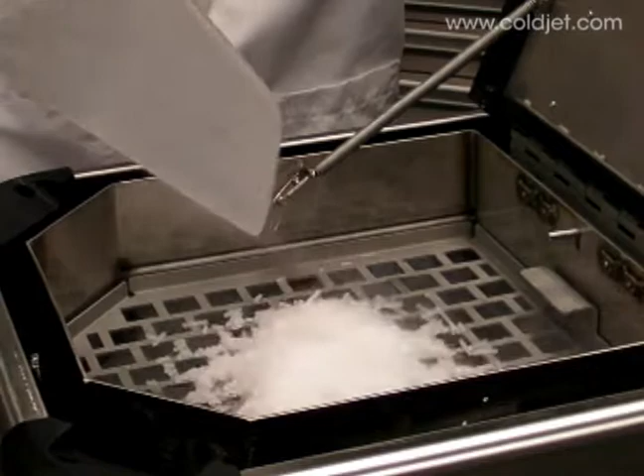Dry ice blasting is a process in which particles of solid carbon dioxide, commonly known as dry ice, are propelled at high velocities to impact and clean a surface. Upon impact, the particles return to their natural state as carbon dioxide gas, and thus simply disappear as they clean.

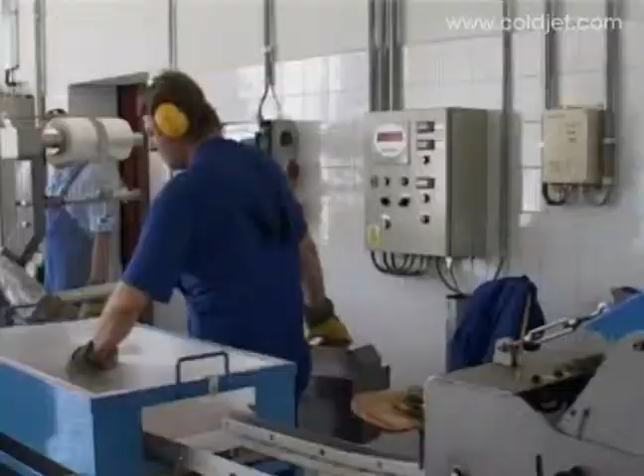From an environmental standpoint, dry ice is made from recycled CO2 that's been recaptured from industrial sources, so you're not producing new CO2. And of course, cleaning with dry ice creates no secondary waste and eliminates solvents. So really it is truly green from start to finish.

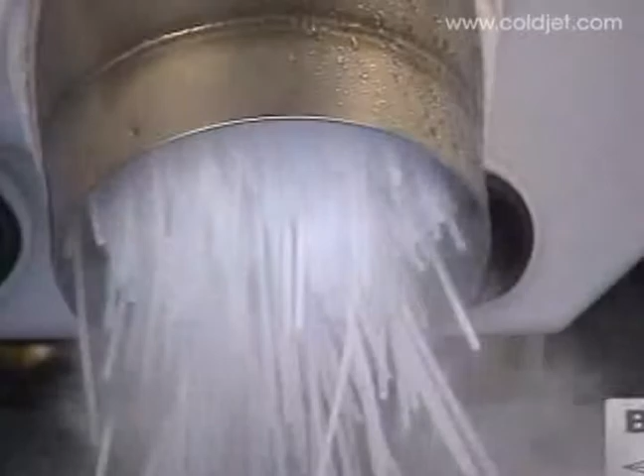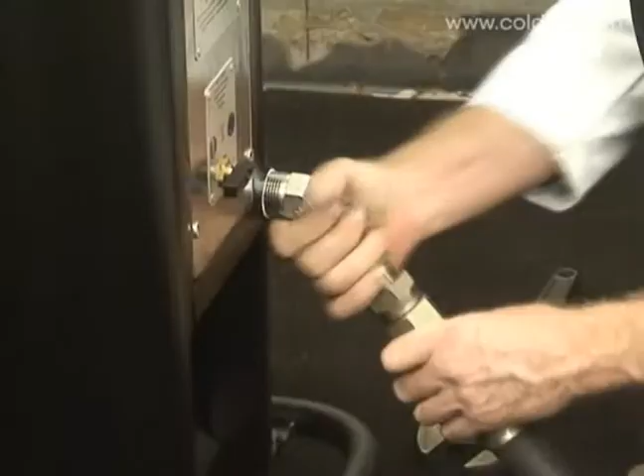And dry ice pellets and blocks are easily available just about everywhere in the world. Just call a producer, schedule a delivery, and you get a nice insulated tote filled with dry ice delivered right to your door. The Cold Jet machines couldn't be easier to set up. Attach compressed air, plug into standard electric, connect your hose, applicator, nozzle of choice, add some ice, and that's it. Then just start cleaning and saving money.

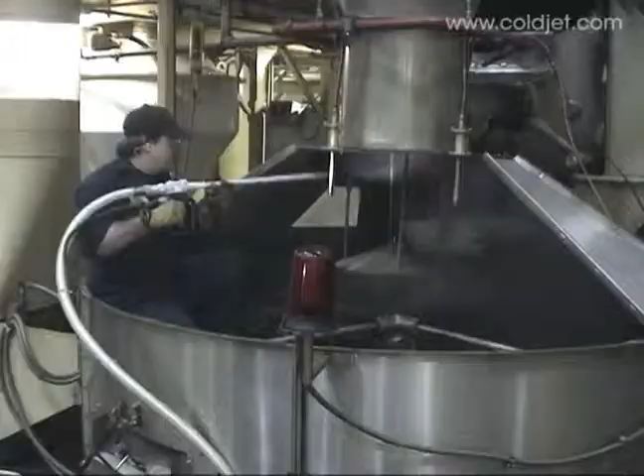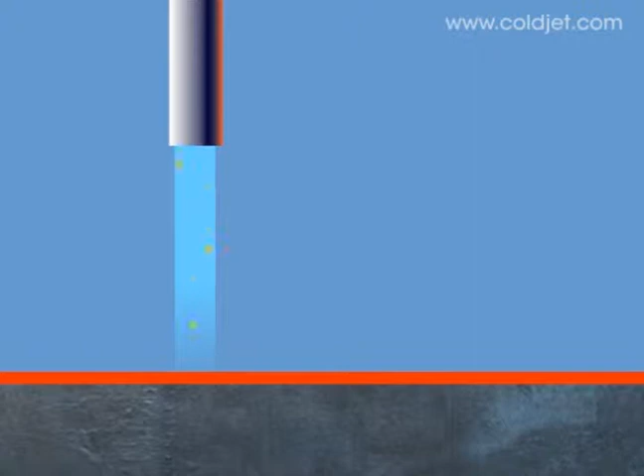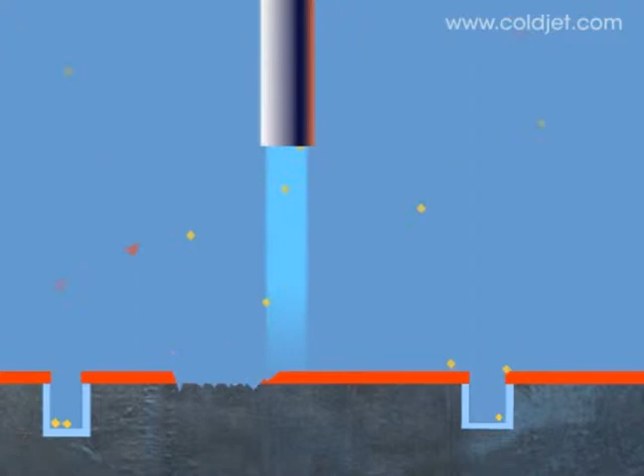Since first being introduced commercially in 1987, dry ice blasting has grown to become a vital part of the industrial cleaning practices in a broad range of industries. Though it is easy to compare the process to sandblasting, dry ice actually removes contaminants differently. Sandblasting is an abrasive process. Although it effectively removes surface contaminants, it also picks away at the substrate, wearing it away over time, altering surface geometries, destroying critical tolerances. Sand particles can also become entrapped, causing critical problems that can shut down the manufacturing process while the problem is solved.

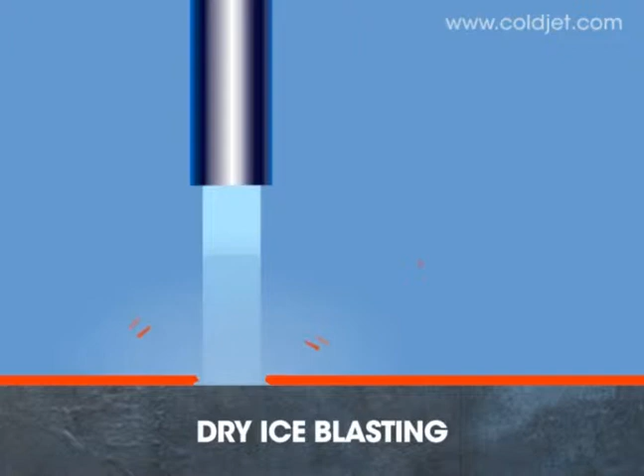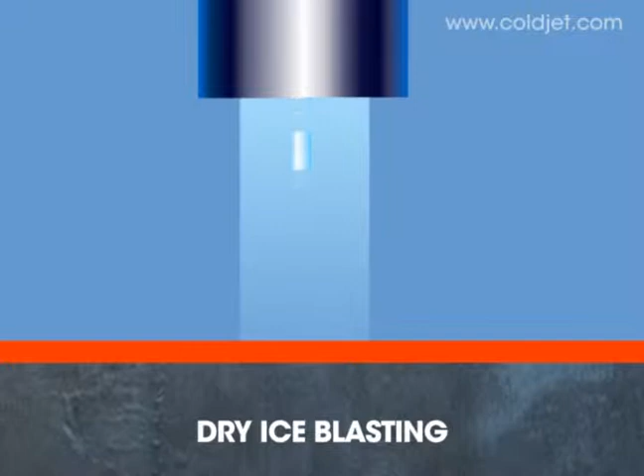Dry ice, on the other hand, disappears as it cleans, and will not alter most industrial substrates. On successful cleaning applications, the dry ice pierces the contaminant, but sublimates upon striking the underlying substrate. The resulting expansion of the carbon dioxide gas actually lifts the contaminant off from the inside out. The dry ice then disappears without damaging the targeted surface, and without creating grit entrapment issues.

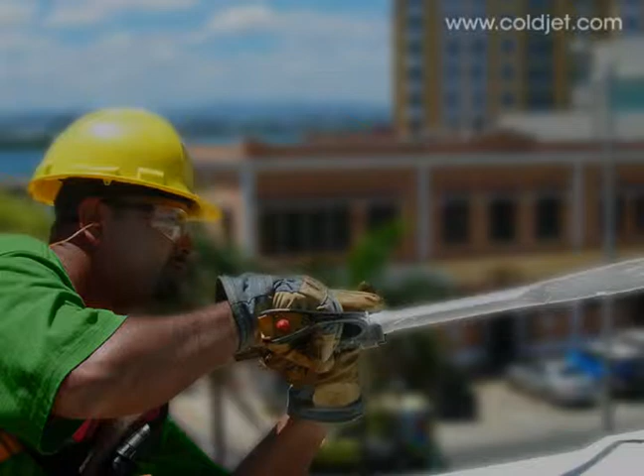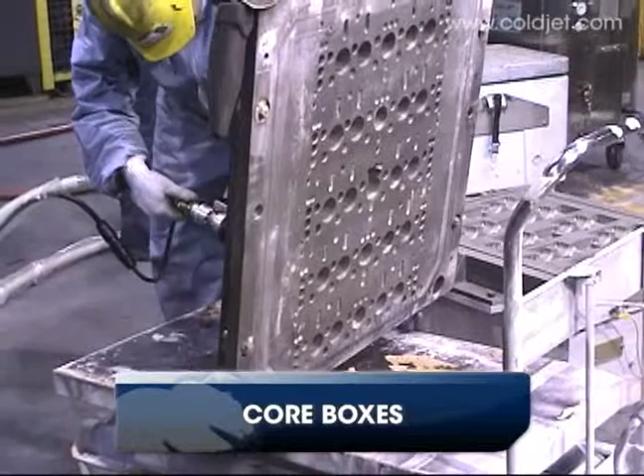Damage is certainly of vital importance. The most significant benefit for many users is a substantial reduction in downtime. Dry ice blasting is most often used right out on the shop floor. Cool down, masking, and disassembly are not required. As an example, in the foundry industry, dry ice blasting is ideally suited to clean hot core boxes and permanent molds in place. Mold cleaning is a common dry ice blasting application, not only in foundries, but also in food manufacturing and in rubber and plastics molding.

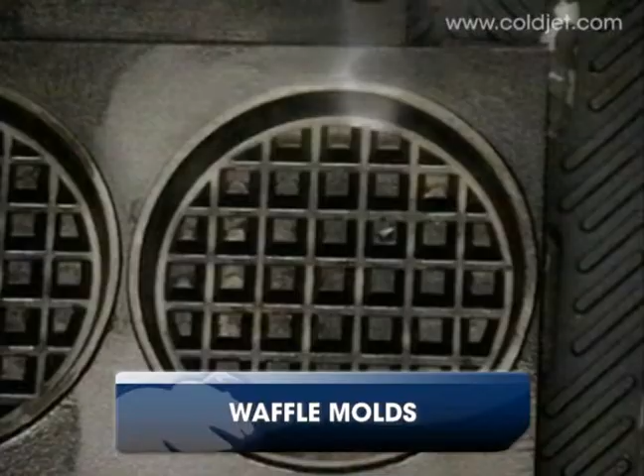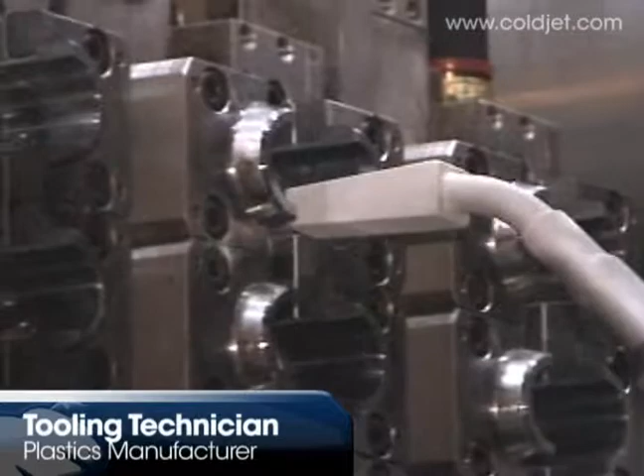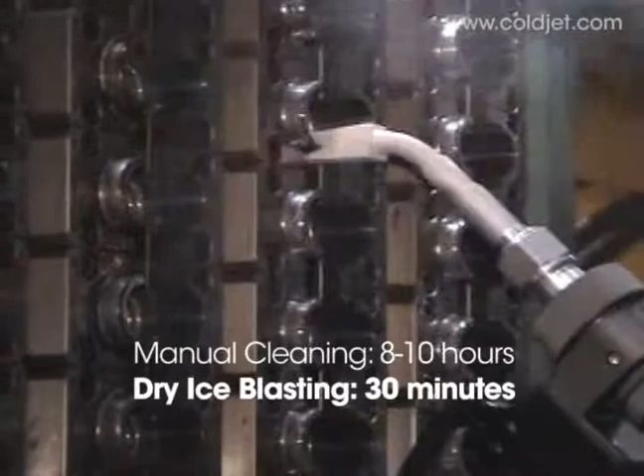Downtime that was once measured in hours, or sometimes even days, is now measured in minutes. Before, due to the dismantling and the extensive cleaning that we had to do, it would take us up to 8-10 hours to do a mold. With the ice blaster, we can do a mold in 30 minutes, 35 minutes completely.

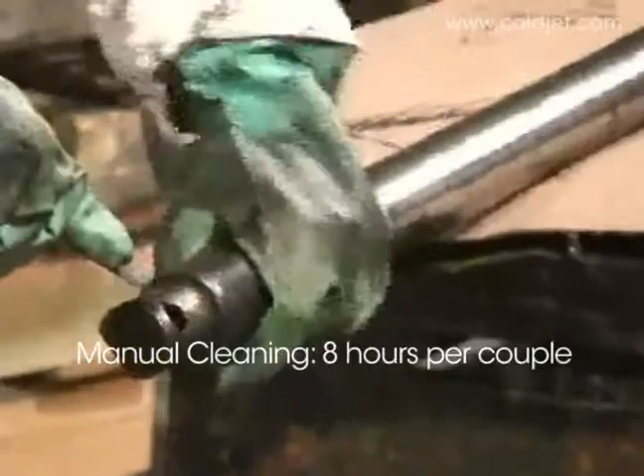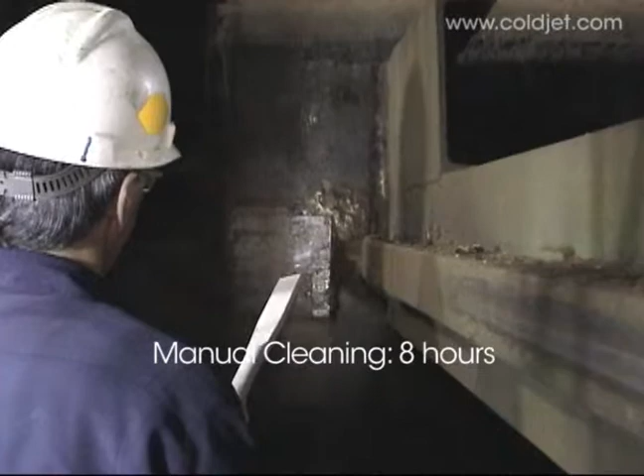Other examples of labor savings are also quite impressive. This printer in El Paso needed 8 man-hours to clean each printing couple, using solvents and rags. Dry ice reduced that time to 1 hour per couple, and cleaned more effectively. This manufacturer of engineered wood products required 8 man-hours to hand clean this hardboard press. Dry ice blasting reduced the time to just 2 hours, while improving worker comfort and safety.

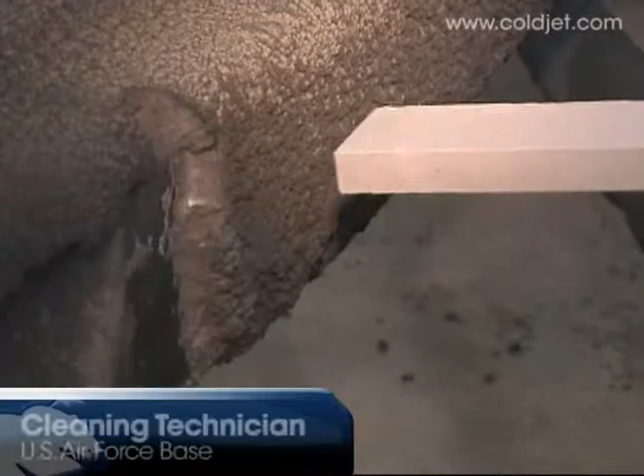A third benefit offered by dry ice blasting is improved cleaning performance. In effect, a cleaner clean. We found it to be outstanding at cleaning parts of aircraft that were normally very difficult to clean. All of the structures are bonded together with sealer, and the ability for the sealer to have good adhesion to the airframe components is completely dependent upon how well the structure has been cleaned.

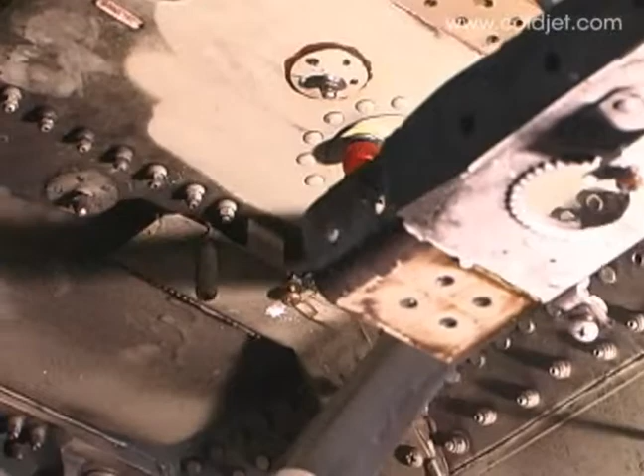And solvents that we use to clean those areas have come under a ban from the EPA. What we found was that the dry ice blasting took care of that need excellently. In other words, we were able to clean better than we could with solvents. And in so doing, we had a higher success rate in promoting that adhesion.

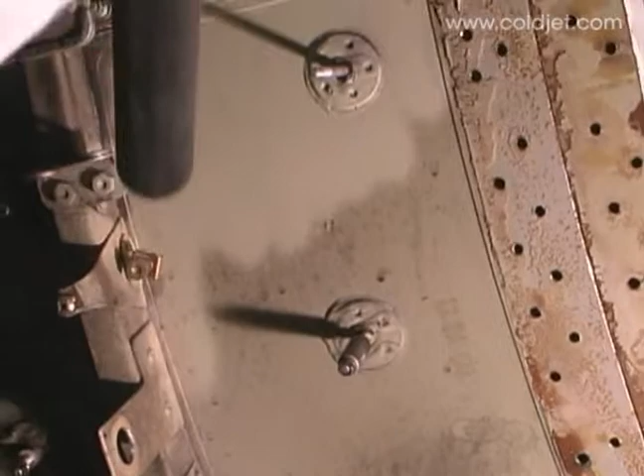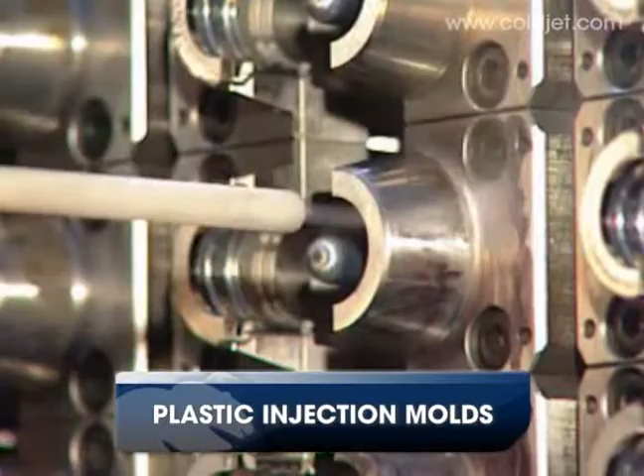Most of our molds are textured molds. The residue and buildup from the plastic starts to fill up the texture. And by keeping the molds clean and by keeping the residue out, we get a much sharper texture definition after the part is painted, which makes it a better looking part and in turn makes our customers happier.

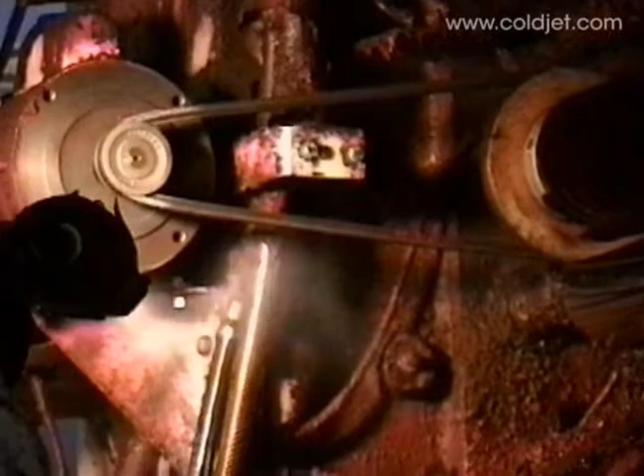Dry ice blasting is far more thorough than hand scrubbing and can be safely used around belts, hoses, electrical wiring, and other areas where grit blasting and power washing are forbidden. In some cases, dry ice blasting offers a way to clean where none previously existed.

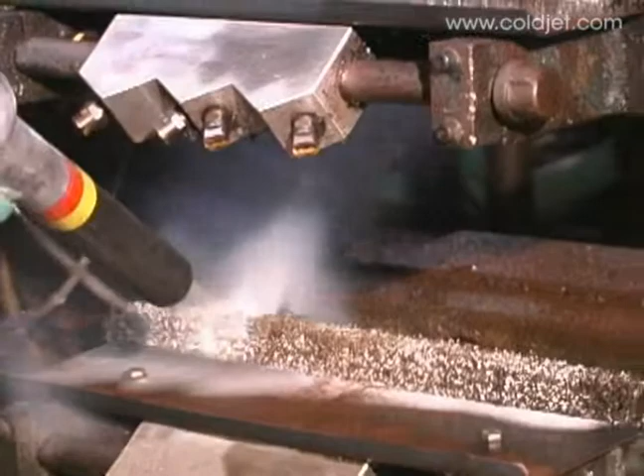There are areas of the press that you cannot get to with a rag and blanket wash. You can't get in between the cylinders and the side frame. You can do a little bit of cleaning in that area, but to thoroughly clean that takes a whole lot more time than what it takes to use the dry ice machine.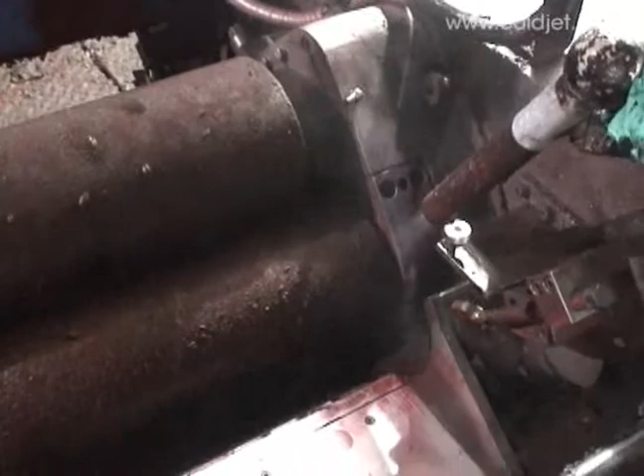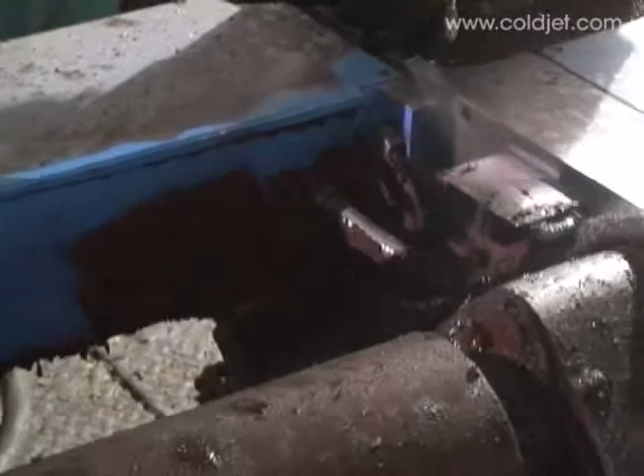We were actually looking for ways to clean them. You know, we were kind of at a dead end. We didn't have any alternatives or any solutions to getting that buildup off. We had to have something that would take the buildup off but leave the ceramic coating on, and that's exactly what the dry ice does. It takes the buildup right off, and we don't lose any of the texture on our embossing pattern, and it just does a wonderful job.

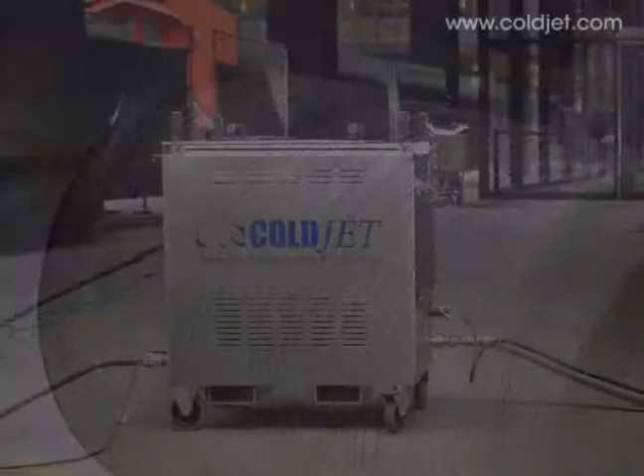A fourth benefit of dry ice blasting is improved worker and environmental safety. Hand scrubbing sometimes requires workers to come into close or direct contact with hot equipment surfaces. Dry ice blasting eliminates this problem. Also, the process reduces worker exposure to hazardous solvents. The reduction or elimination of solvents is beneficial not only to workers, but to the environment as well.

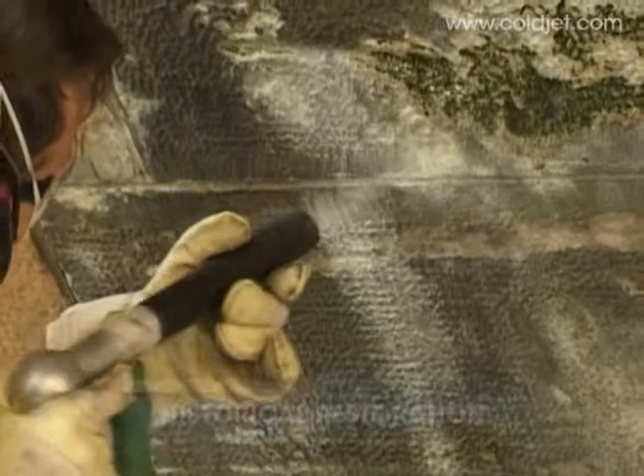From an environmental point of view, the Cold Jet dry ice blasting process is pretty sweet. First of all, you're using dry ice that is recycled or recaptured from some other industrial process. We're using a recycled product that disappears as you're using it and doesn't leave any secondary waste. I'm not an environmental engineer, but what I know is VOC bad, no VOC good.

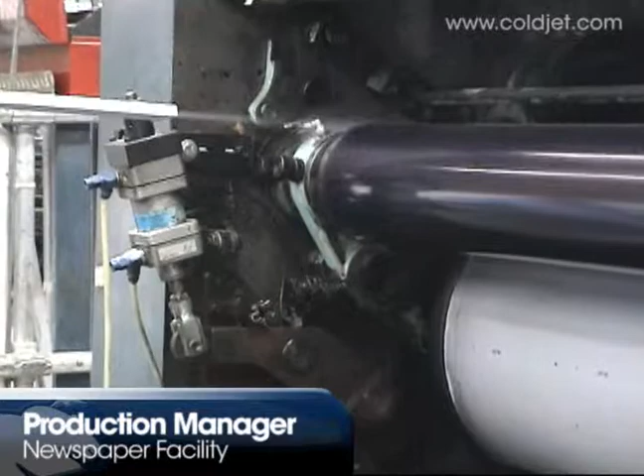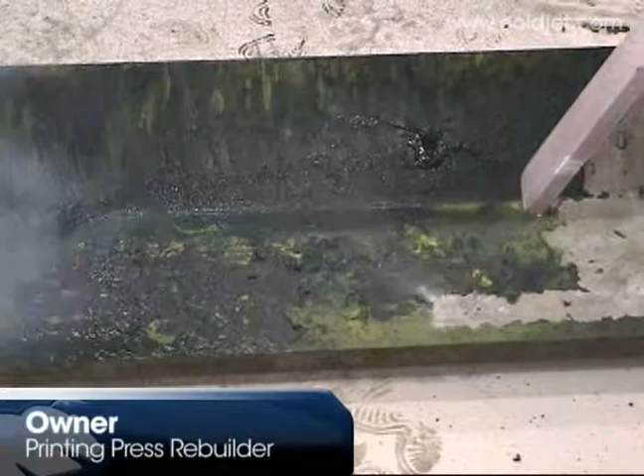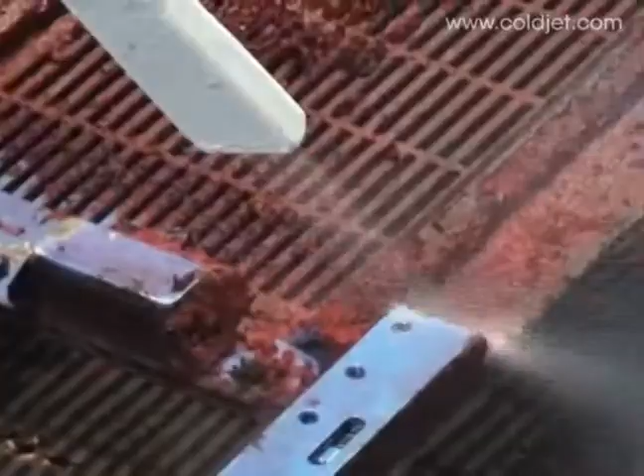The dry ice cleaning system offers us an environmentally friendly way to clean the press. Some of the ways that it's an advantage for us is, like I said, it's the solvents. The mechanics trying to use the solvents, which bothers their eyes, irritates their eyes and their nose, and also the cleanliness of it as far as using the dry ice. There's no carrying chemicals or using the wire brushes, and it's just a much simpler, cleaner process for us.

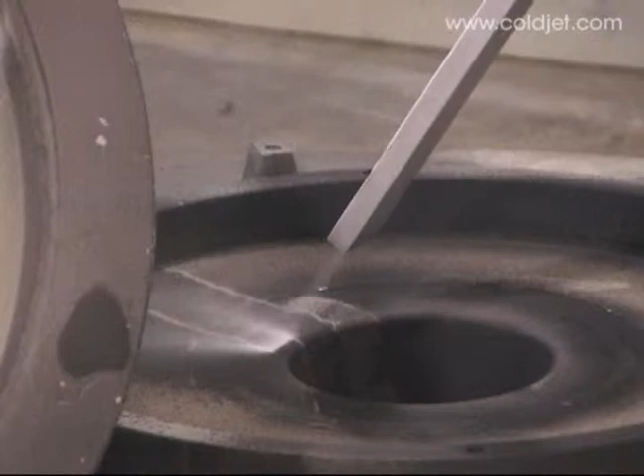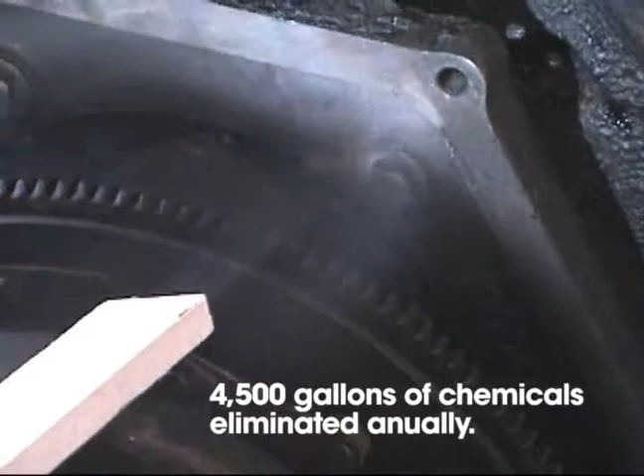And in so doing, we've been able to reduce the amount of chemicals that we use. And that was a critical point for us, was to reduce our total air emissions and our hazardous waste stream. Tinker Air Force Base in Oklahoma and Hill Air Force Base in Utah have combined to eliminate over 4,500 gallons of chemicals annually by turning to dry ice blasting equipment. In addition, Hill reports that labor and material costs have been reduced by more than 75%.

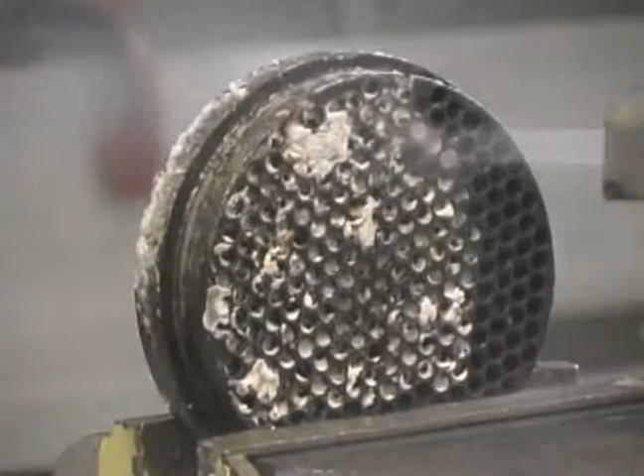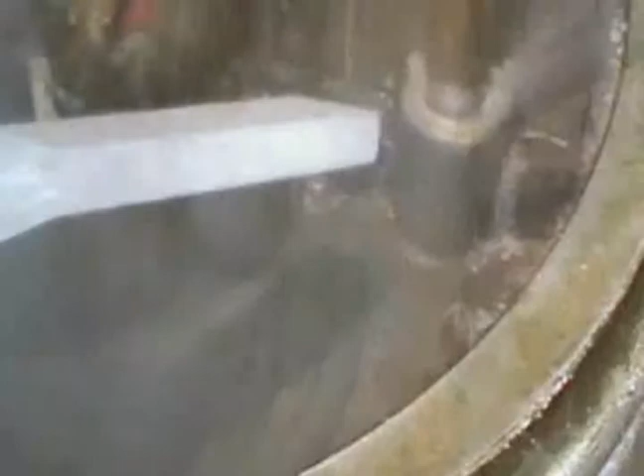Dry ice blasting also dramatically reduces waste disposal. When using sand to remove hazardous materials, the sand mixes with the contaminants, and all must be treated as hazardous waste. Dry ice, on the other hand, disappears and does not become part of the waste stream. One service contractor in the petroleum industry reports that when they used sand blasting, they measured their waste volume by the train car. Upon switching to dry ice blasting, they now measure waste by the barrel.

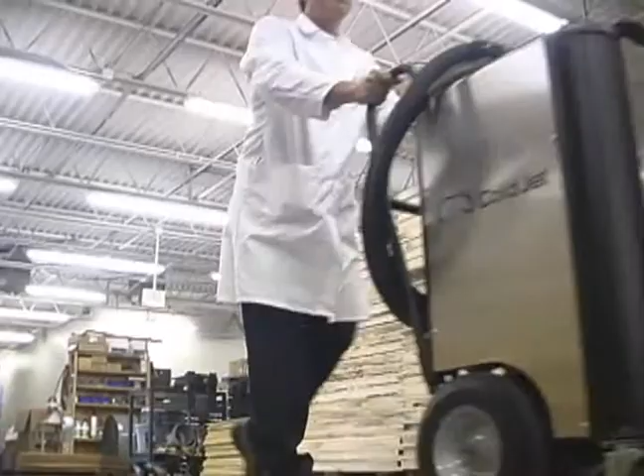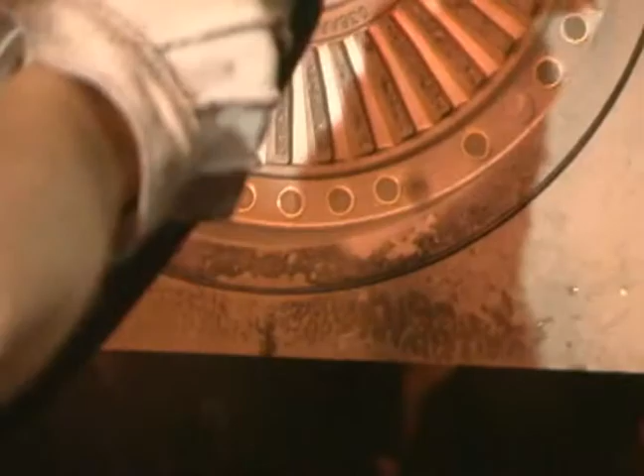Dry ice is generally available in three forms. Most dry ice blasting units require the use of rice-sized pellets. We are the only company to offer blasting units capable of using any form of dry ice, whether it be pellets, block, or nuggets. Not only are these smaller crystals more effective than the larger pellets in cleaning equipment with intricate surfaces or tiny openings such as screens or microvents, but they also provide about 1,000 times more surface strikes for a given volume of ice. This provides more thorough surface coverage, leading to faster removal rates on thinner contaminants.

Our customer list includes numerous Fortune 500 companies, all branches of the military, and a number of public utilities. Despite the presence of such familiar names, a substantial portion of the customer list is comprised of smaller companies who are known primarily to their customers or within their industry, but who nonetheless enjoy the substantial benefits offered by dry ice blasting. With dry ice blasting, we've really become the leader in our industry, in our market.

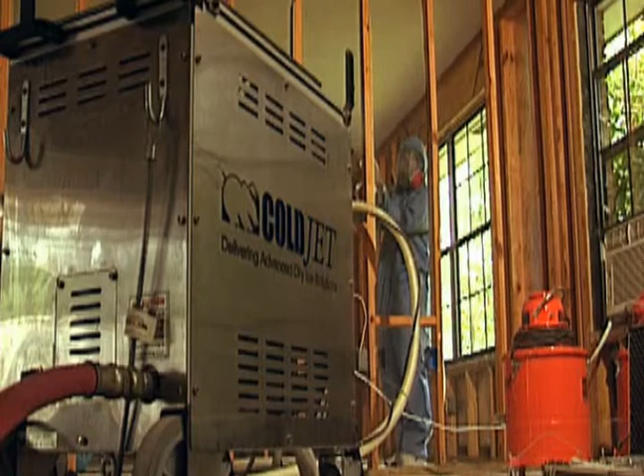I work very hard for my money, and when I'm going to make a purchase of any significance, I do a lot of research. I have to. And the Cold Jet system, it was so much more complete. If you want to make the money, if you want to do the big jobs, you want to make production, and production, by the way, is profit, then Cold Jet is the way to go.